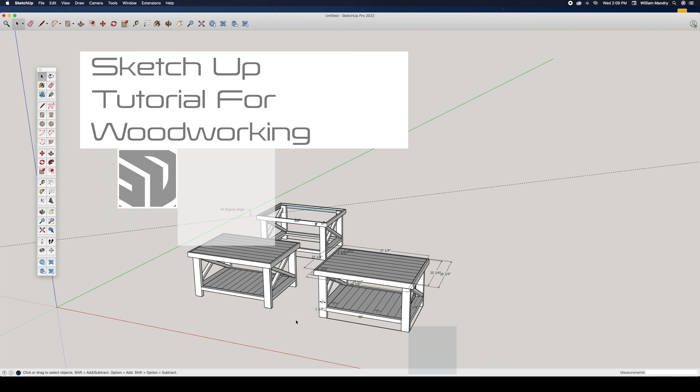In this episode, I want to show you how you can utilize SketchUp to plan out your next woodworking projects. If you're brand new to SketchUp, I'm going to show you some of the beginning tools you'll need to utilize to create these plans. In the process of designing this farmhouse coffee table in real time with you, I'll share some tips and tricks. Let's get right into this.

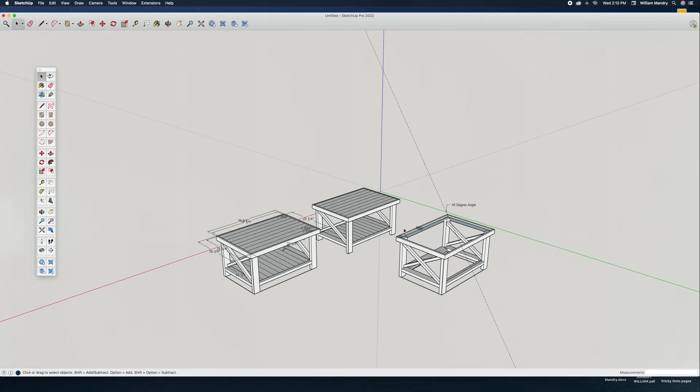Alright, so to begin here, we're going to want to go to File, New from Template, and you're going to want to click Woodworking. And I would definitely work in inches. If you're in the US, that's going to be a lot easier. If you accidentally do millimeters, it gets a little confusing. So I'm going to click Woodworking.

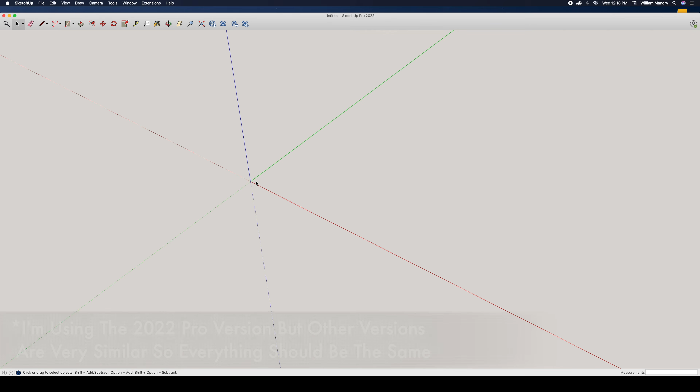Okay, so when you first open up SketchUp Pro, it might be a little disorienting because this is a new way of looking at projects, in a 3D model. Now, you see this dotted blue line going down? That's basically underground, so anything built under here is underground. The ground is these solid red lines and solid green lines, so this is basically the floor right here, and you can kind of imagine that. The blue line is just the height, so you don't have to worry about this over here. You won't really be building over there hardly at all. You kind of build in this quadrant right here, especially for woodworking—we don't really build a lot of things underground.

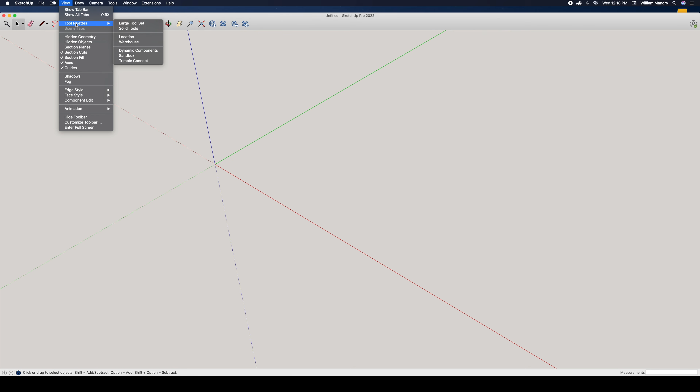Now, the first thing you're going to want to do is open up your tool palette. So you're going to go to View, Tool Palettes, and you want the large tool set. That's going to make it a lot easier to build. Now, there are a lot of key commands, and I'm going to be going through those while we build so that you can learn those.

All right, so before we use our tool palette to build out this coffee table, I wanted to mention that the way you view everything in SketchUp Pro is actually fairly simple. However, you're going to want to use a mouse that has a wheel at the top—the two buttons left and right, and then a wheel in the middle. If you don't, it makes it a lot harder to zoom in and pan.

So the pan function, you simply click on the wheel, and then it's going to let you go any direction—down, up, and side to side. All I'm doing is holding down the wheel in the middle, and then I can move my mouse, and that's how I view everything. Now, if I want to zoom in or out, all I have to do is roll the wheel. If I roll the wheel back, I zoom out, and if I roll the wheel forward, I zoom in.

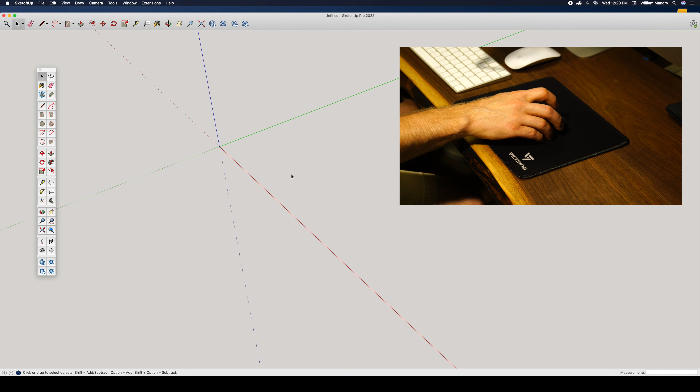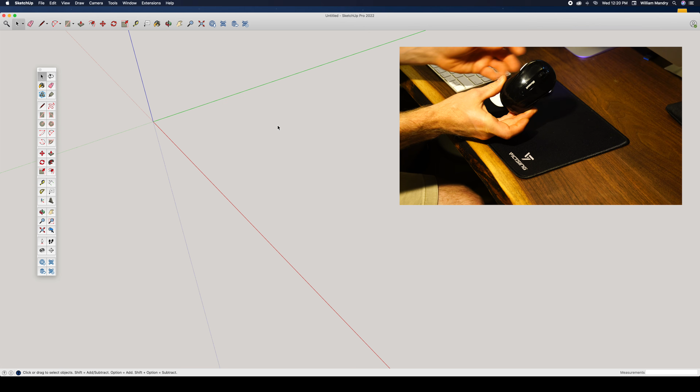If you don't have the wheel mouse, this makes it incredibly difficult—there's a lot of different buttons you have to press on the keyboard while pressing the buttons on a mouse. So if you're on a Mac, I would recommend buying a mouse with the wheel. They have wireless, wired, they're fairly cheap, so I would definitely recommend doing that. Learning the keys is going to be much more difficult, and the wheel makes all the difference.

All right, so now it's time to start designing the coffee table. Now, the first thing we're going to want to do is figure out where we're going to actually start building this coffee table. A lot of people just start at the origin—I don't really like doing this because your project is really smushed in between these axis lines. So what I like doing is bring the origin point out somewhere over here.

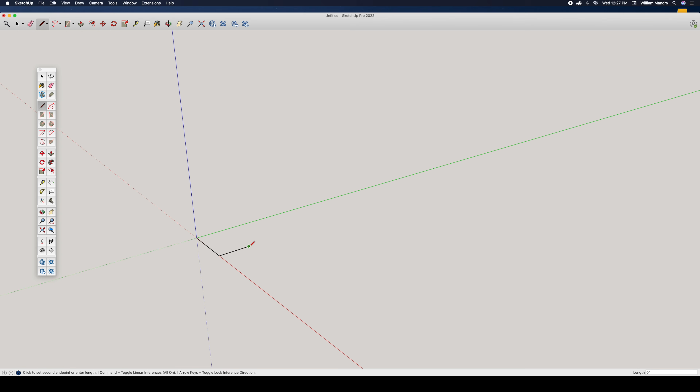To do that, I simply drag out with the line tool—that's the pencil up here on the tool palette. Usually you have the selector; if you click the pencil line, you get the line tool. Or you can simply use the shortcut, which I use, which is L. So you just push L on the keyboard and you get the line tool. Now, I'm going to be going on the axis so I know that it's level to the ground, and then I'm going to bring it out here with the green axis, kind of out here, and that's where we're going to start the project. I kind of like that a little bit better. So now we need to get our base for our coffee table.

For any project you're doing, I would recommend making a base. Whatever the footprint of your project is, you're going to want to establish that, because you might have to reference the base for some kind of measurements or adding pieces on. If you don't have a base, it's very hard for the program to automatically know where your outside perimeter is.

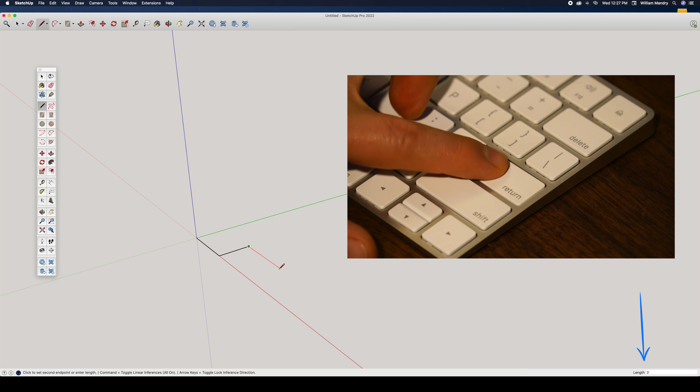So what we're going to do is drag out and lock onto the axis, then type 3 foot. You can see in the bottom right hand corner it says 3 foot, and all you have to do is press enter, and that's going to get our length. Now for our width, we're just going to drag, snap to the green axis, and do 2 feet and click enter. Usually it intuitively knows where the points are, so you can simply let it snap to that.

And now we got our footprint. This is our footprint for our coffee table. So now that we have the length, which is 3 foot, and the depth, which is 2 foot, we need to establish the height of the project.

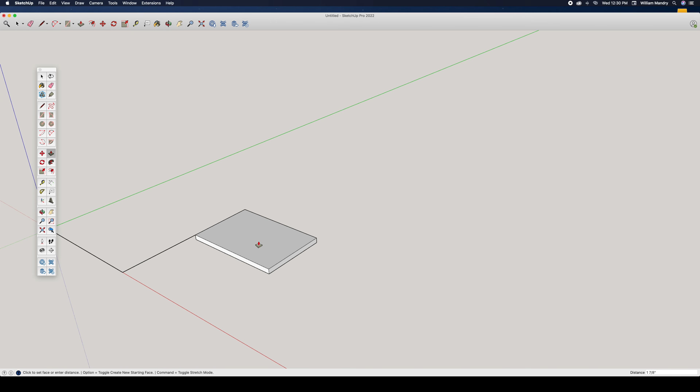We're going to be using the push-pull tool. You can simply click here, or you can click P for the tool, that's the shortcut. Now, to do this, you have to click on the surface, and while you're clicking you can drag up or down. If I click it and drag down, that's going to pull the whole thing downwards, and if I pull it up, it's going to pull the whole face upwards. While still holding the left button of the mouse, you can drag it up and down. As soon as you release the button, it leaves it where it is, okay?

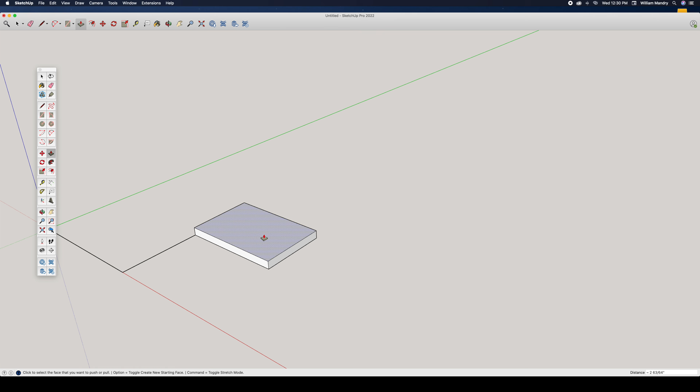After you release the button, so I'm not holding the mouse at all right now, what you can do is type in a specific measurement. So we're going to type in 20, press enter, and that's going to automatically make that cube 20 inches in height. What we have now is the footprint of the coffee table, so everything pretty much is going to be around or in this cube.

Before we put anything else on this coffee table, I'm going to show you how to use the eraser tool. You can click on the eraser, and then these lines I don't really need anymore, they won't serve any purpose, so I can simply go ahead and erase those. All right, so that's how you use the eraser.

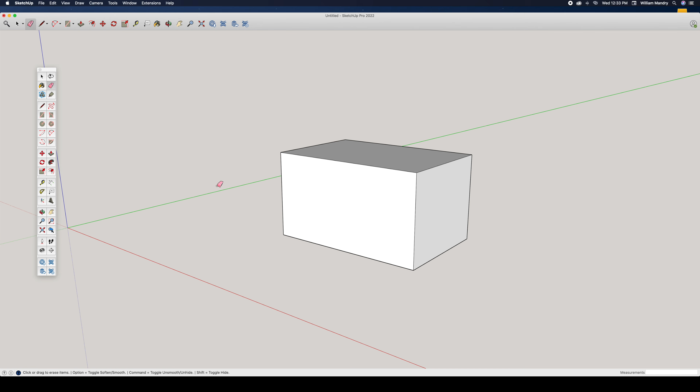Now to get back to your pointer, basically all you have to do is press the spacebar on the keyboard, and now you can select things again.

All right, so now we're going to start designing the sides for the top of this coffee table, and they're actually made out of 2x4s. So we're going to get our line tool. Basically, the top 2x4s encase the top boards of the coffee table.

With our line tool, we simply have to click at the end point, and then drag down 2 inches. So again, start the line. To get an exact measurement, I release all the buttons on the mouse, then go to my keyboard, click 2, then enter, and that makes it exactly 2 inches. And so that's our midpoint, and that's our measurement.

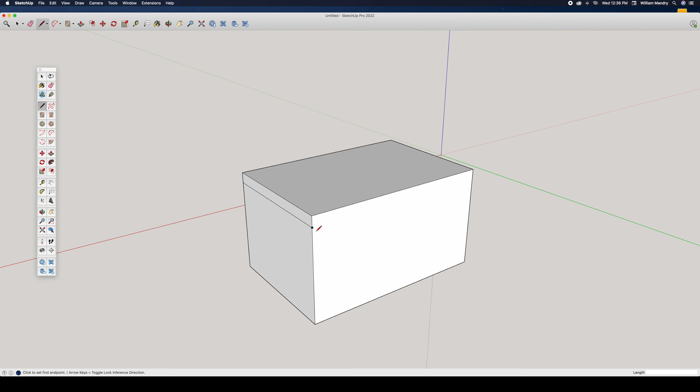Now I need to go all the way around this cube, and it should be intuitive enough to know exactly where to snap on that line, so I don't really have to make any other measurements. See, it intuitively knows if I snap on the axis that I'm trying to get 2 inches all the way around. So make sure it's on the axis when it lights up, and make sure you click on all of those edges.

Okay, so since we're going to be doing 45-degree miters at the corners for these top boards, we're going to have to get our protractor tool, and that's this guy right here. So I'm going to click that, and all we have to do is make sure our protractor, see that if it's blue, the protractor is on the blue axis. We want it on the top of the surface.

And then we're going to click on the edge of our top, and that way our protractor can drag out. Now we want 45 degrees, so I'm just going to click 45 on my keyboard and press enter, and that's going to give us our 45-degree angle. Now I'm just going to repeat that on all 4 corners, so 45.

Okay, so now you can see we have 45 degrees marked on these corners here. And that's going to be important to measure out the next part of our project. So we're going to take our line tool, so that would be L.

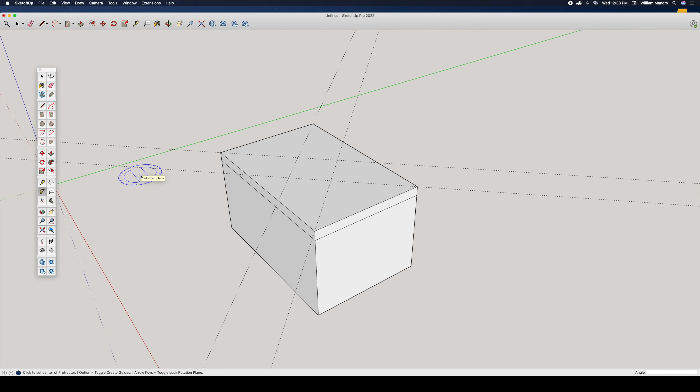We are going to go out from the edge. I'm going to actually cut these 2x4s to 1 3/8 thickness, so I'll type 1.375 and then enter. It's just easier to type in that way, I think. All right, so I click escape to end that line.

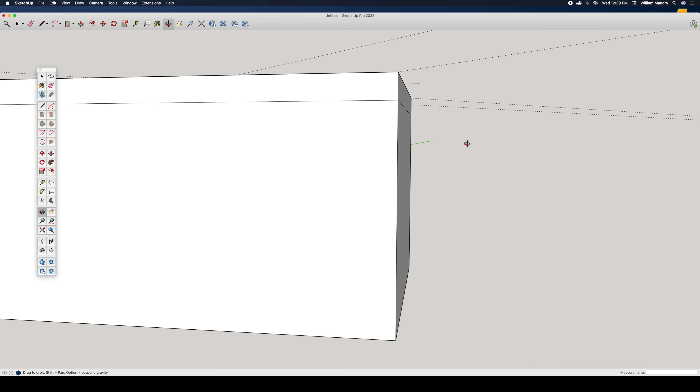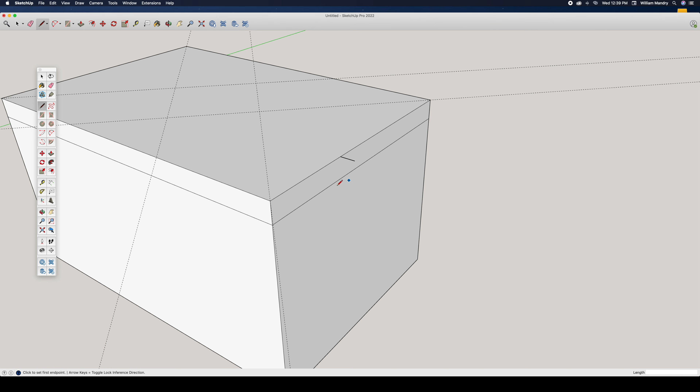Now, all we have to do is go from the end point, and you can see right here, it's on the top, out, and that line right here is basically the thickness. We're actually using the line tool here as a measurement. I actually do that a lot in SketchUp Pro, to mark a measurement so I have something to reference on. Because I can't reference right here on this line how far I need to go for 1 3/8.

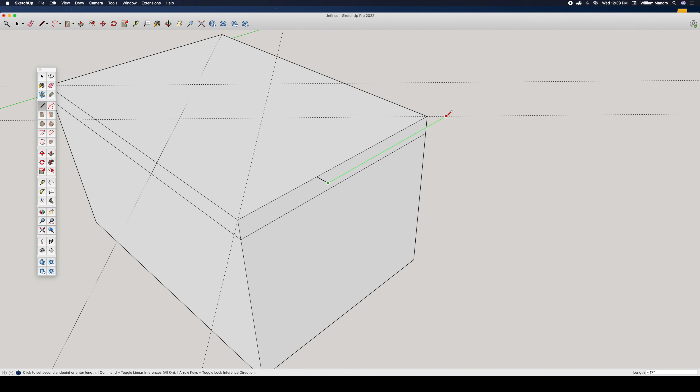But if I just measure a line here and then erase it later, it works perfectly. So I had this reference point, and now I can just click it. Since I have the thickness measured and the 45-degree measurement, look, it already knows what I want to do. So just from the end here to the 45-degree line, and then I'm just going to do that all the way around. Again, the program already intuitively knows what you're trying to do based on the measurements you have and the axis you're going on.

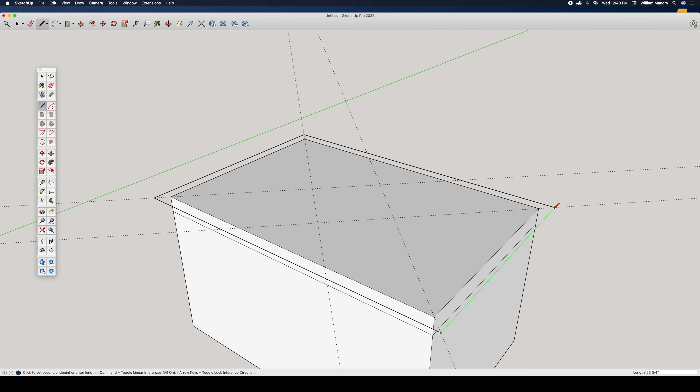Okay, so I'm going to go all the way around here, again using the pan tool to pan around while using the line tool. I just click the scroll at the top, scroll around, and make sure you click all the lines. Now I'm going to press escape to escape out of that, and then get the erase tool because we need to erase this half line right here, and then this line because it was just a measurement. So we're going to get rid of that, click L for our line tool again, and then finish off that top.

Okay, so that's what the top is going to essentially look like. But there's a few other things that we need to do to get this right. So to make these 3D - right now the 2x4s are basically just a 2D model, and we're going to need to make this 3D.

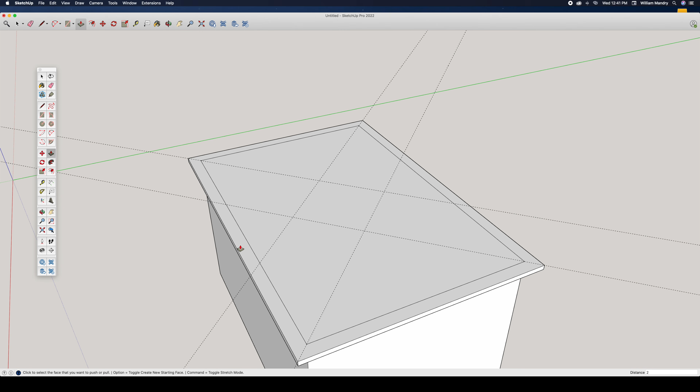So to do that, we're going to do our push-pull tool, which is P, and then we're going to push this whole thing down. Again, you just click it, drag it down, and then release the mouse, and then you can type in how far down you want to go. We want to go down 2 inches. Okay, there we go. And now that's basically going to be the top edge of our coffee table right there.

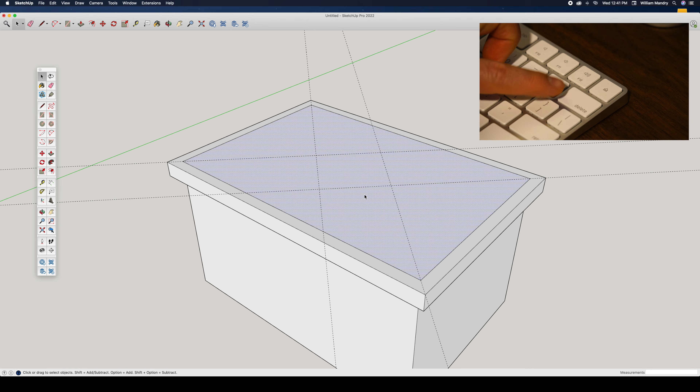All right, so now we're going to use our selector. We're going to select the middle of this coffee table and we're just going to delete it. We don't need that right now. So now we're left with this.

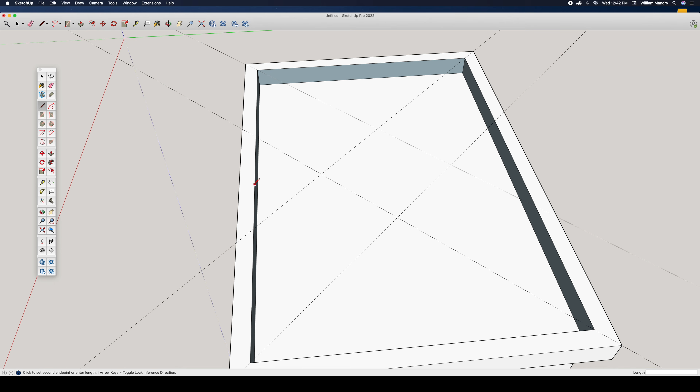The next thing we're going to do is create the rabbeted edge on these 2x4s for the top boards to go into. We're going to measure from the edge, go out, make sure the line is on the axis, not like this - see, it turns black when it's not, but it turns green when it's on the axis. So you're going to want to make sure you remember that.

Now we're going to go out 5/8. And like I said, I don't really work with fractions. I just do 5 divided by 8, which is 0.625. So I'm just going to type in 0.625 and enter. All right, so now we have this line.

Now that's our rabbeted edge. So we're going to have a rabbet 5/8 wide and then 5/8 deep, because our boards for the top are going to be 5/8 in thickness. So it just gives it a nice measurement.

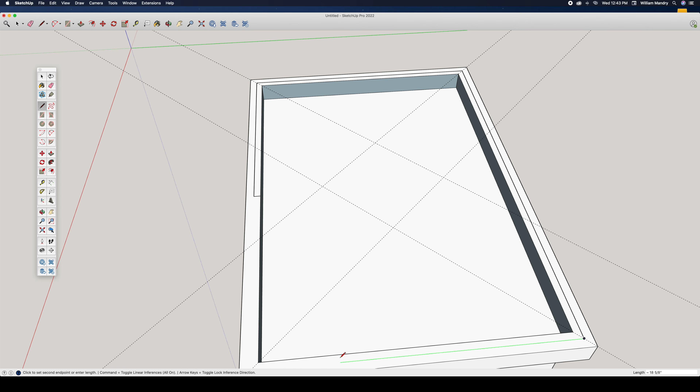So this is going to have to go all the way around, and then on that line - we're going to go all the way around because the rabbet cut has to go all the way around. Or it's like a relief cut, there's a couple names for it. I usually just call it a rabbet.

All right, then we're going to get the erase tool and erase that line that we used as a measurement. All right, so now we need to push-pull the inside down 5/8, and that's going to get a rabbeted edge.

So you can see here that it's highlighting that whole inside edge, and we simply have to drag it down just a little bit, and then all we have to do is type 0.625, which is 5/8, and there we go. So there is our rabbeted edge that all the top boards are going to sit into.

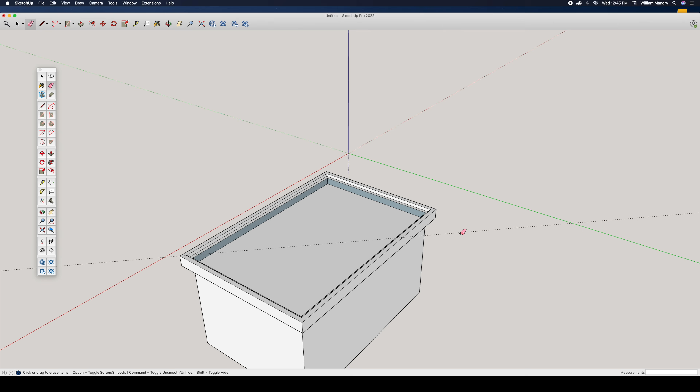Now that we have that, we don't really have any use for the 45-degree measurements anymore, so we're just going to go ahead and use our eraser tool and get these out of here because they're just for reference. Since all these boards are actually different boards and they're not going to meet perfectly like that, we're going to create our seam here to more accurately represent what it's going to look like.

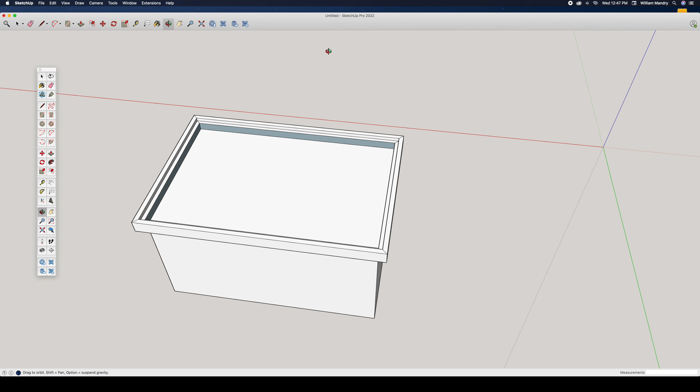All right, so now we have the 2x4s all the way around the top completed.

What I'm going to do here is click the space bar and select all these faces and just get rid of them. And the bottom one. All right, so now we're left with this.

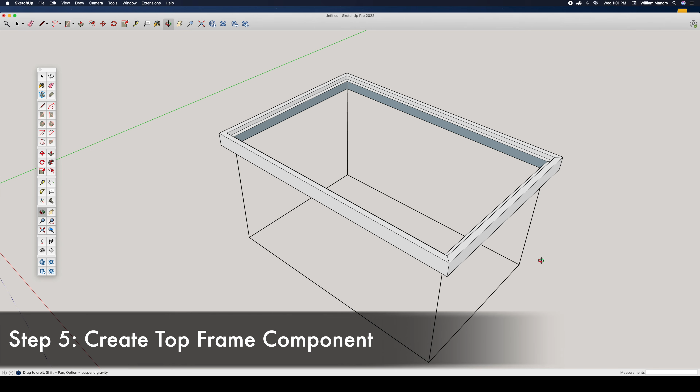Now, what I would do here is go ahead and triple click. If you double click, you click the face, but if you triple click, you click all of everything touching one another.

And we're going to make this a component by clicking this, which is the little blue grid, and click that. And we're just going to name this top frame.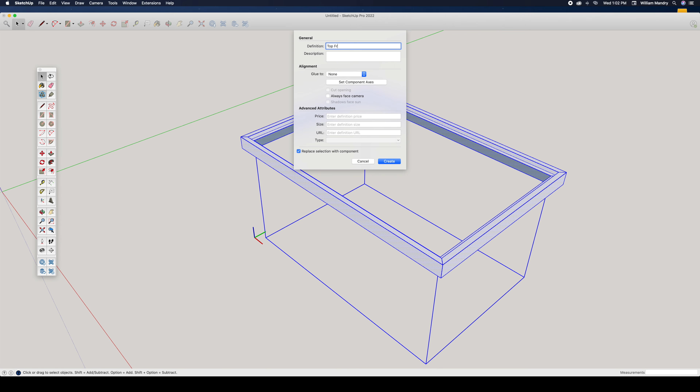Now what you can do with this is if you want just this view right here selected and nothing else, you could click M, which is the move tool, and then click option, and that's going to make you able to copy it. So we're going to copy this and just put it over here to the side.

And then we can use this as a reference, or maybe you screw this up and you want to go back to this stage. Either way, it's kind of useful.

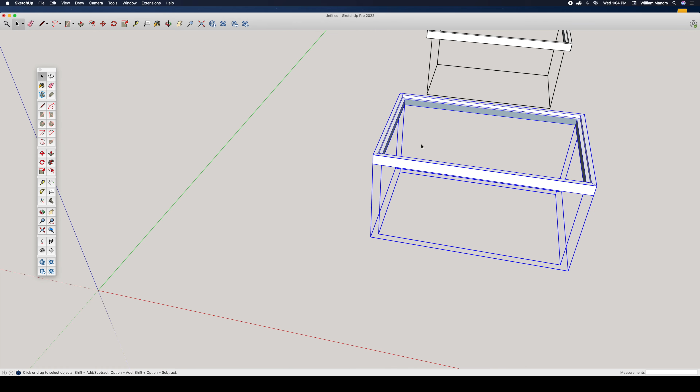All right, so now that we have this as a component, if you go to your select tool or spacebar and click it, you'll notice that this whole thing is now a component and not different pieces. And so we have a copy of the component over here, and then we have this as a component. And what that's going to enable us to do is to build things off from it without affecting this structure.

Okay, so now we're going to move on to creating the 2x4 legs, and we'll just start right here. We're just going to get our line tool, which is L. We're going to measure over 3 inches because that's how wide I want these 2x4s, and I'm just going to cut the 2x4 at 3 inches wide. So I'm going to click 3 and then enter.

And then from that endpoint, I'm just going to go up, and we're going to make the 2x4 go all the way up to the edge of our rabbited edge. So then click that, and then I'm going to click over, and then go down along this edge, and that's going to create a 2D face for that 2x4.

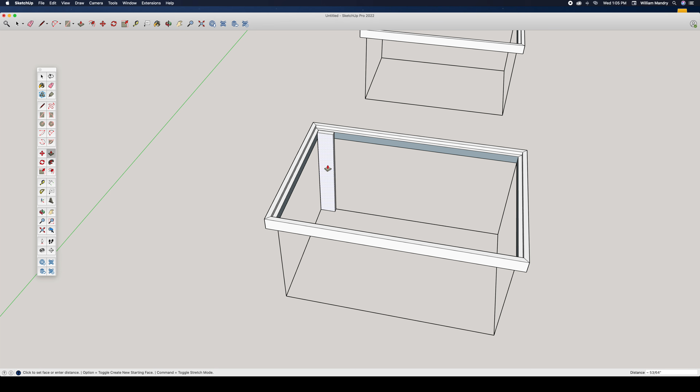And now to make it 3D, all we have to do is use the push-pull tool, which is P, click the face, drag it out, so 1.375, enter. And now we have our 2x4 leg, and we just simply repeat that process 3 more times.

So all we've got to do is click line tool, go over 3 inches, enter, and then P for push-pull tool.

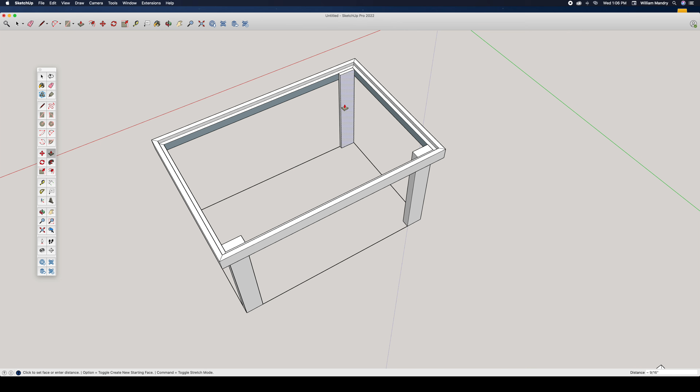All right, so now that we have the 2x4s at the top and then the 2x4s coming down, we're going to go ahead and create the shelf that's going to be towards the bottom.

We're going to get our line tool here, and I'm going to be going up 3 inches from the bottom. So again, I'm going to be using the line tool here as a measurement. Basically, it's just easier that way for me. So I'm just going to go up.

I'm going to click 3 inches and then enter, and then drag the pencil up, and it's going to find the midpoint of the line I just made, and it's also going to find the end point of the line I just made. And I think that's a really easy way to find where you want to come off from. So then I just click that endpoint, and I'm going to go across the axis all the way across, just like that. Now, this is going to be another 2x4 that's cut at 3 inches width.

So we already know what the width is, but we need to get the thickness. So all we have to do is drag our pencil line up this axis, and then we're going to click 1.375 again.

So 1.375 is going to be 1 3/8, and that's the thickness of all my 2x4s. I'll enter that, then go from that point over. Now we have the side of our 2x4. To complete this, I simply take the push-pull tool, push it, click 3, and enter. Now we have one of our base pieces on.

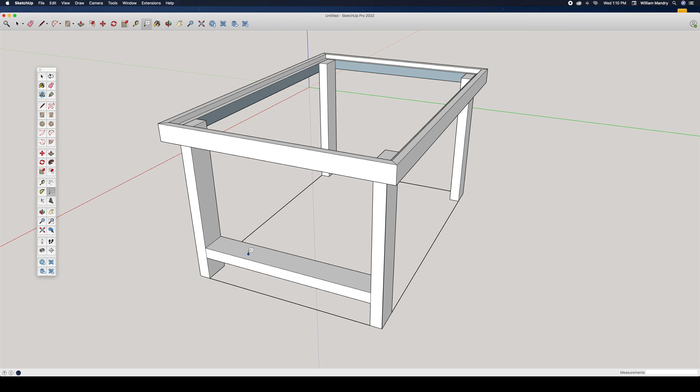We're going to create the other 2x4 side piece over here the same way, using the line tool. I'll go up 3 inches, zoom out, go from that endpoint over, then up 1.375, then over, snapping to the axis and edge. Then P for push-pull, push it, click 3, and you've got the other board.

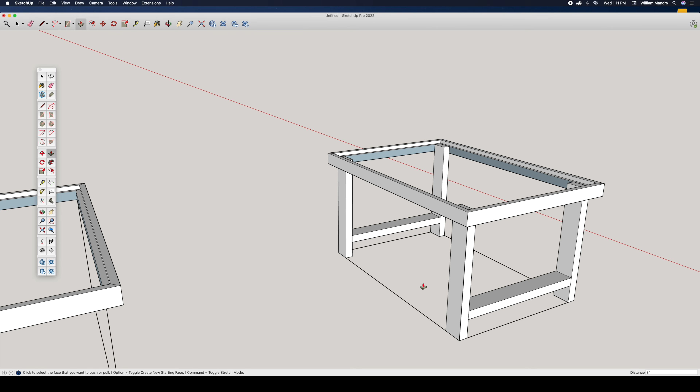Now we need to create the 2x4s that go this way. Instead of measuring it all out again, I can zoom in, click this edge, go over to the edge I want to reference, and it transfers that measurement onto that edge. Then I click that, zoom out, and snap right here, giving me that line automatically.

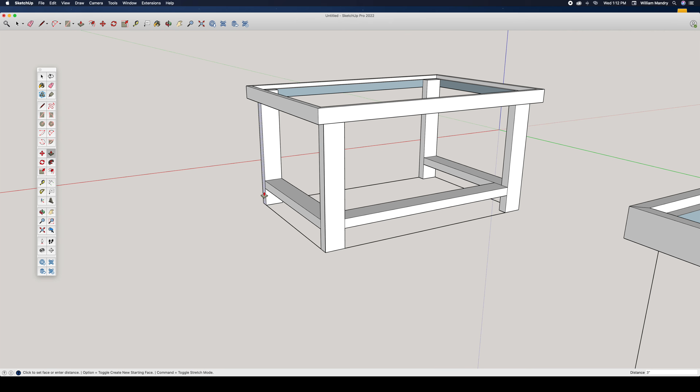Same thing here - it already knows exactly what I want to do because it's referencing another point, so I'll just utilize that. Then again there, and I'll use the push-pull tool to push it 3 inches. There we go, and I'll repeat that on the other side.

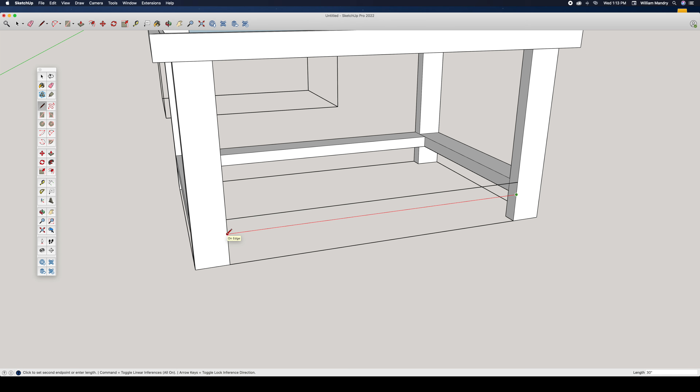So: line tool, zoom in, reference that point, go over, let it snap, then down, let it snap, then over, let it snap, push-pull 3 inches. All right, so now we have our baseboards.

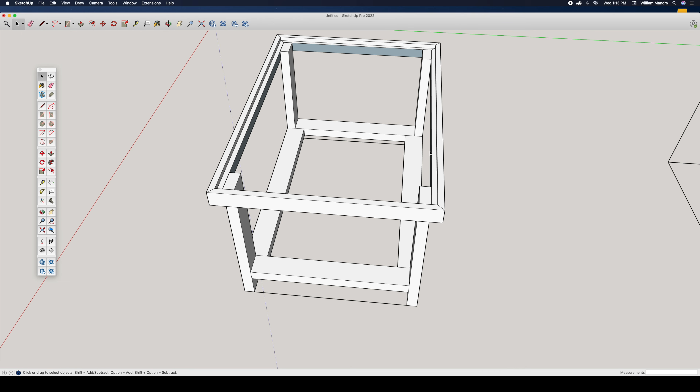Now the only thing we need to do is create another rabbeted edge for the boards. The boards are sitting at the top right here, and they'll sit in this rabbeted edge, going across and sitting in here. I'm going to do the same thing at the bottom, but it'll be a little different - I'll show you what I'm going to do.

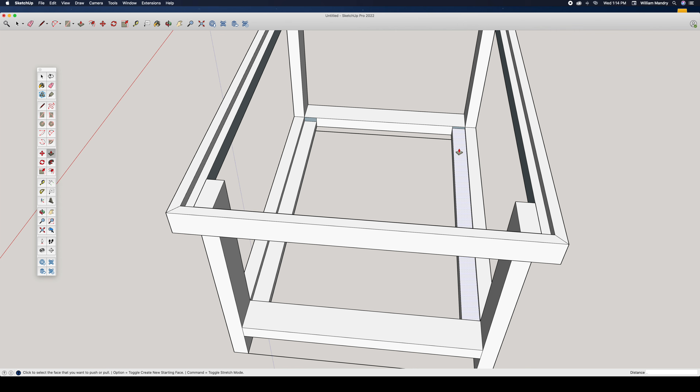I'm going to create a line from the edge of the 2x4 that's going up, all the way across, and do that on this side as well. Then we'll get our push-pull tool and push this down 5/8, which is 0.625. I'll do the same thing right here, 0.625, giving us a nice 5/8 rabbet to lay our boards across.

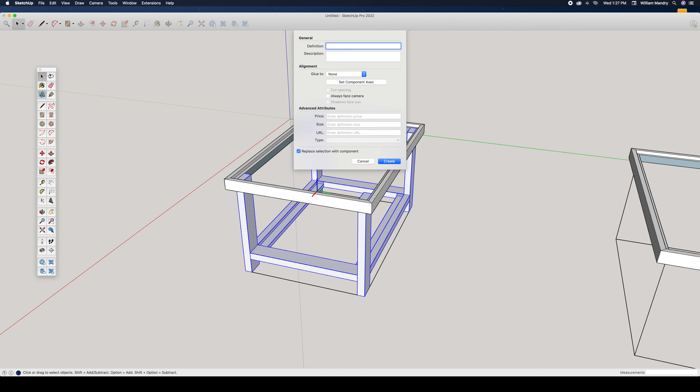Now that we have this structure, we're going to click it all - triple click to select everything. Now that component is our base, our legs and our base, so we're going to make that a component. We'll go to the blue grid, call this 'base,' and create that. Now we're going to create our X's, which go across right here.

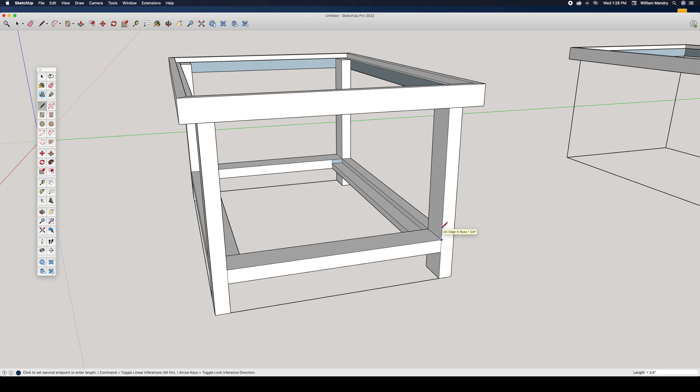We're going to go up from the edge here to 1 3/8. Then over to the intersection right here, because we want it to stop where we can see it, and down 1 3/8, just like that, then down to the corner here. Now we'll use our push-pull tool to push that 1.375, and there's our first X.

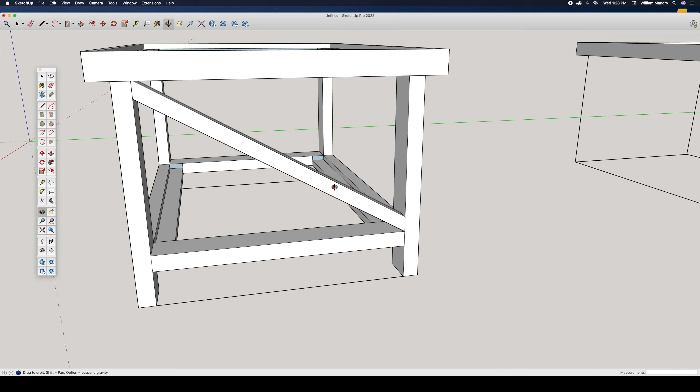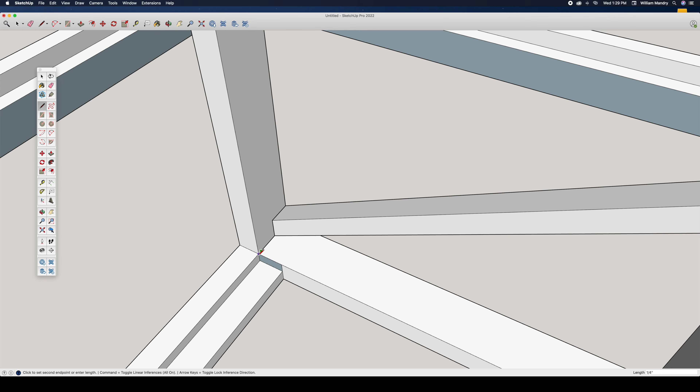Now we're creating our next X right on the edge of that one. We'll go inside here, and this one goes the other way. However, we need to make this match up, so first we'll do a line from here and go over 1.375 - you can see it's not quite to the edge here, and that's why we had to do this measurement. I'll go up all the way to the top, and over from here to here - we know that right there is our intersection.

Now that we have these lines - and again, these are just measurement lines - we're going to go over from this point 1.375, and then this point should snap to the grid.

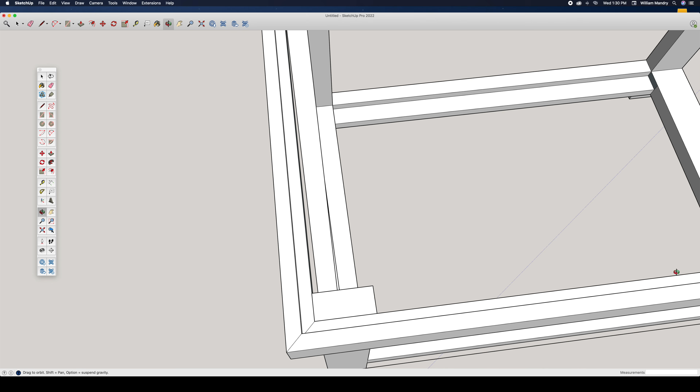Midpoint in base... there it is. On edge, yeah, see? It finally figured out what we're trying to do. I'm trying to get it on the edge because those pieces are going to be together.

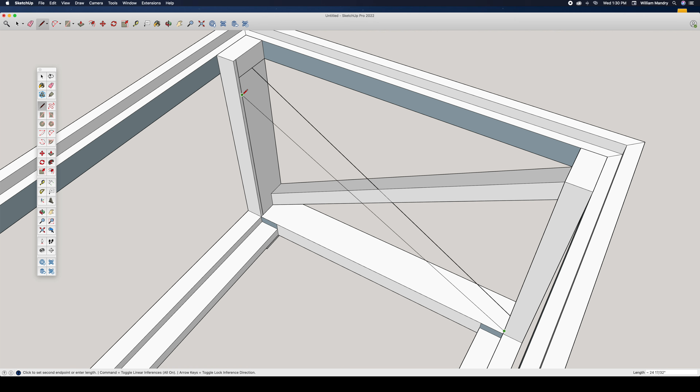All right, now we can go over 1.375, and now it's figuring out what we're doing. So on the edge, then go up to here, and then go down. There we go.

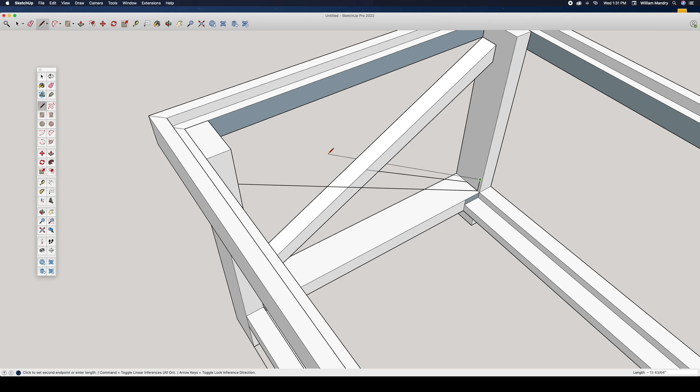Okay, and then we're going to go to our eraser, erase this point, get our line tool. Now we can go up from here. There we go, and go up to there. Now we have it. All right, we'll erase everything else. That was a little tricky.

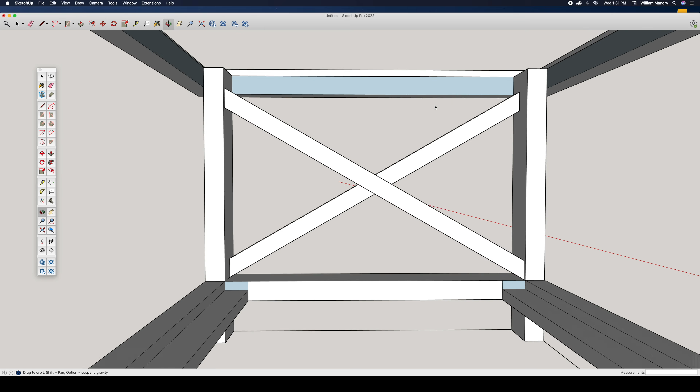There might be an easier way to do it, but it's just because the measurement didn't land right on the edge of this board, so we kind of had to float it in there. Sometimes that's tricky when you have to float a piece inside another piece like this. Sometimes that can be hard. So now that we have that right though, it's the perfect X.

Now we can go ahead and push-pull it 1.375, and it should match right on the edge of that board. Yeah, there we go. All right, so let's take a look at how that looks.

There we go. So I'm gonna click on our X pieces, and you need a triple click. So triple click and you get the whole X. Then I'm gonna go to component and call this X.

Then you simply have to click the M for move tool. Then you're gonna click option key and that's gonna make it copy. You can see the little plus. When I push it, I make sure it stays on the red axis, okay?

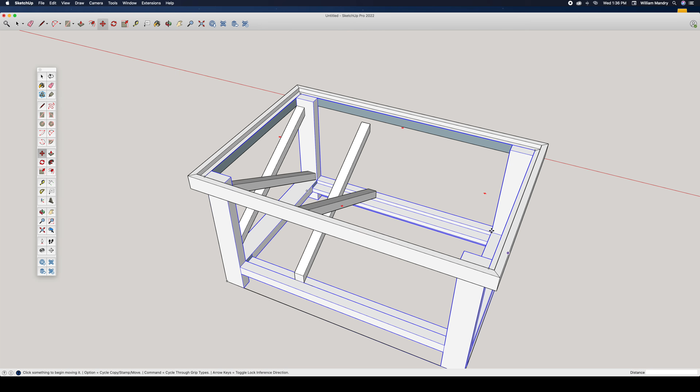Now I need to orientate my screen differently to make this measurement go in right. So I'm gonna orientate my screen differently. I'm gonna re-click it and just move it on the red axis. If it moves off, you can always put it back on, okay? Now I'm gonna get it as close as I can by looking at it. Okay, that looks good. Now I'm gonna release.

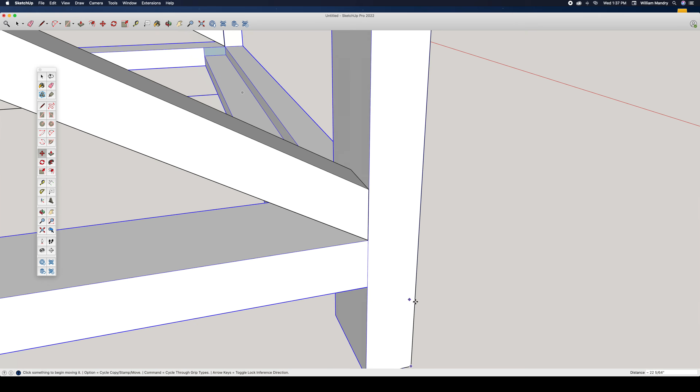I'm gonna zoom in here. And if it's not perfect, I can always get it more perfect, but I'd say that's pretty perfect. And then we can zoom out, and now we have our X's in place.

Now what you can do is click on selector, then click the X's, see how it clicks both X's. And then now I could do component, and I could call this X times 2, or X's actually, I'll just call it X's. All right, there we go. Now we have that component.

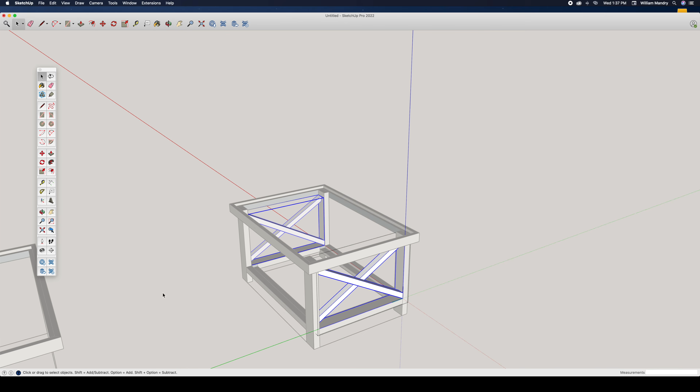All right, so let me show you how these components work now that they're all done. I can simply get the move tool, which is M, and then I can move out the different components. So this is what we did with the top. Okay, so if I wanted a new top, I can simply move that out and build a new one.

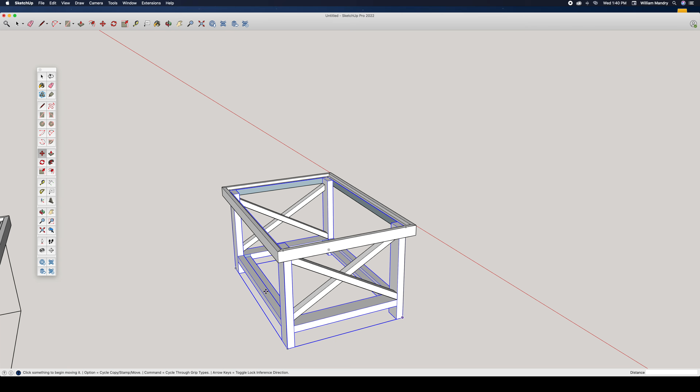Maybe I want to see what it looks like without the X's, so I can simply move out the X's, see how it looks, and then move them back in by just undoing my action. Or maybe I want to create a new base, I can just move the base out. So that's a really easy way to modify the coffee table if you don't like the design and want to try different designs out. That's basically what the component tool is supposed to do.

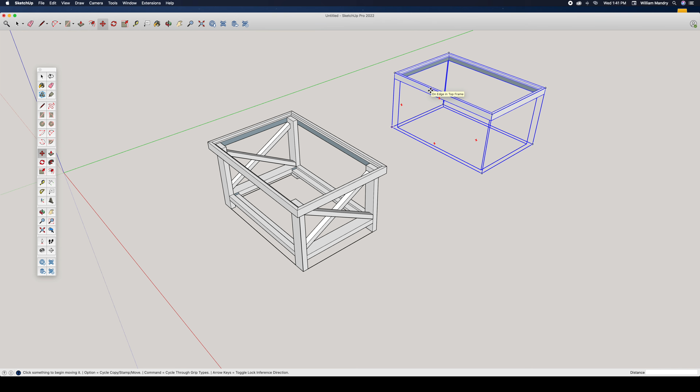So we're going to go ahead and delete this guy since we know that we like the design. All right, so now that we have this all done, I kind of want to make a model of just that in case I want to play around with it.

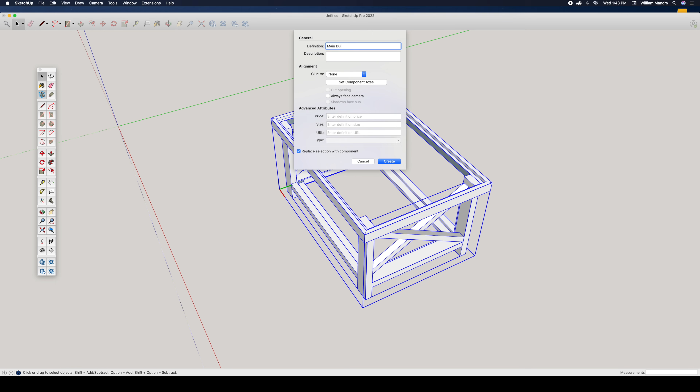So I'm going to select all of this by highlighting all of it. Hold on, let me do that again. Get it all. All right, now that selects everything. And now I'm going to make this a component, and I'm just going to call this main build.

Okay, and now what I'm going to do with that is I'm going to move this. I'm going to click option and copy this because this is basically the main build. The slats on the top to make the top and the shelf are fairly simple. This is what I want to see, the underneath side. So we got that copied. Now I want to keep this as a full component, but I want to explode this. So by explode, basically you make different components again.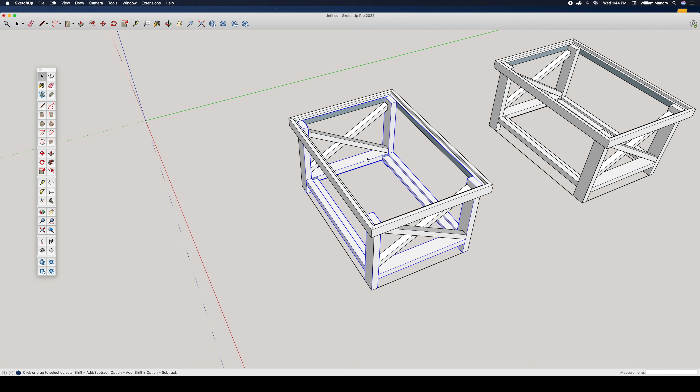So I'm going to go spacebar, click this, and click explode. Now that should make it to where all my individual pieces are left intact. And they are. All right, and then this should be one full piece.

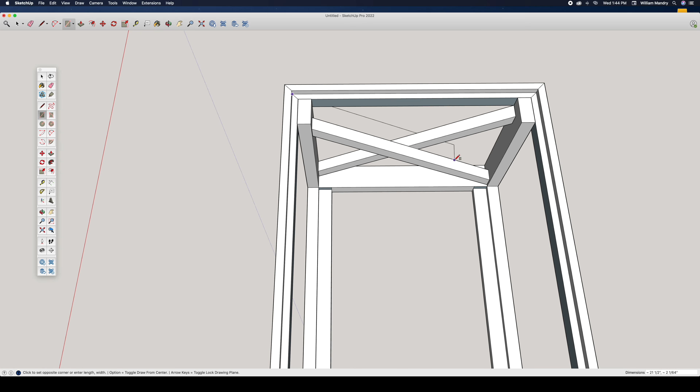So now if I build the slats onto here, I could just reference this as the main structure to get my measurements. I'm going to get my rectangle tool, R, drag from the inside corner here, and then go to the other side corner. Then I'll drag that up, push-pull, and push it up 5/8, which is 0.625.

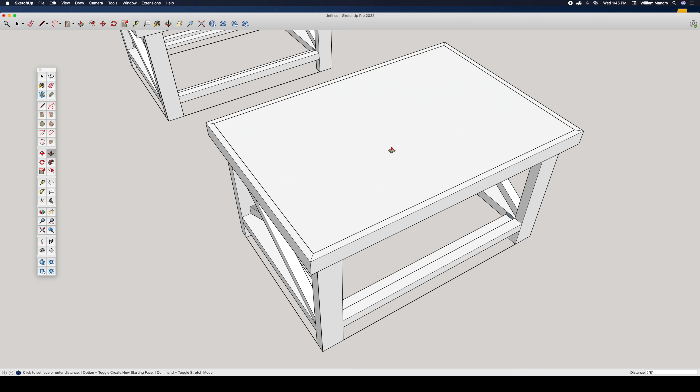Now obviously it's not going to be one sheet like that, it's going to be slats. So next, all we got to do is take my dimension tool and measure from this point to this point. And that is 25.25. So the left side, after doing measurements, is going to have to be...

37.25 long, comma, 3.0625, which is 3 1/16. And there we go.

And then the next one is going to have to be 37.25 in length, comma, and this one's going to be 3.1875, which is 3 3/16. It shouldn't be noticeable when you look at it, but it was necessary to make up for the odd number.

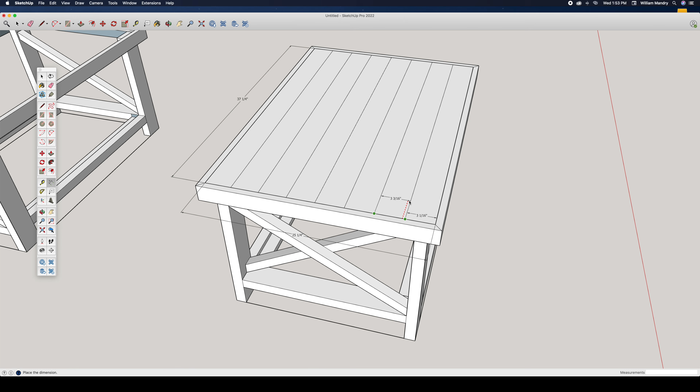Let's just double check that. We'll measure it and make sure that this measurement right here is 3.0625 width. Yep, 3 1/16. And then all these are 3 3/16. All right, so we got that done.

Now we need to do the bottom. I'm going to go ahead and triple click this top, make it a component, and call it top. Now I'm going to go ahead and hide this - you can right click and click hide. That's going to allow me to create the bottom without having to try to view through there.

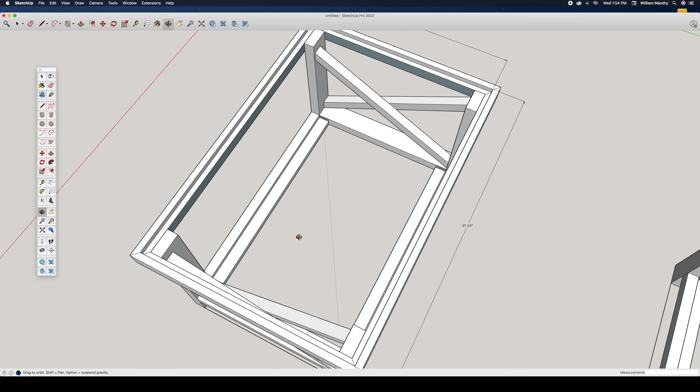Okay, so now the bottom, I'm going to be going the opposite direction. We're going to do something similar to what we did at the top, which is create a rectangle here, and then use the push-pull tool to push it up 5/8.

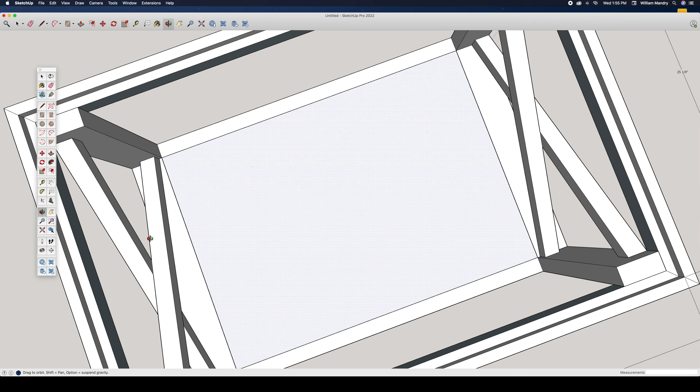All right, so now what we have to do is create our slats. I'm pretty sure, if I remember correctly, they're even. So I'm going to use my dimension tool from that point to this point, and yeah, we get a nice even 30. So if we make all the boards 3 inches wide, then all we need is 10 boards.

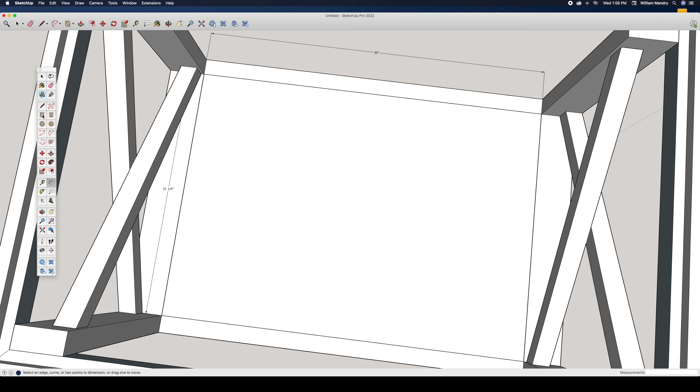I need to do one more measurement here, from this point to this point. Okay, so it's 20.25. We'll take our rectangle tool and type in 20.25, comma 3. I'm going to take the rectangle tool and create 9 more of these. So here we go, 20.25-3. All right, there we go.

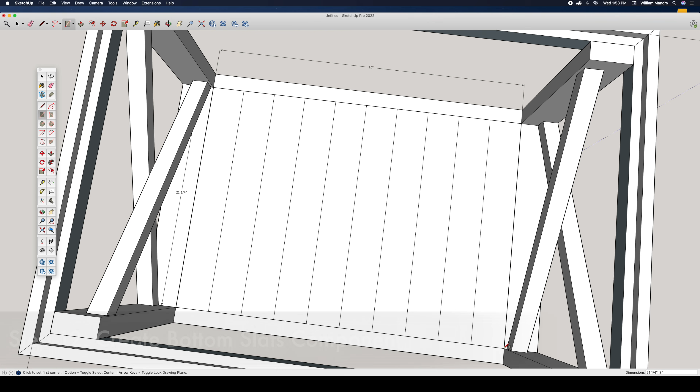And so now we're going to triple click to select all, make this a component, and call this bottom. Then what we need to do is go to edit, click unhide, and do all. That gives that piece back. All right, so there we have it.

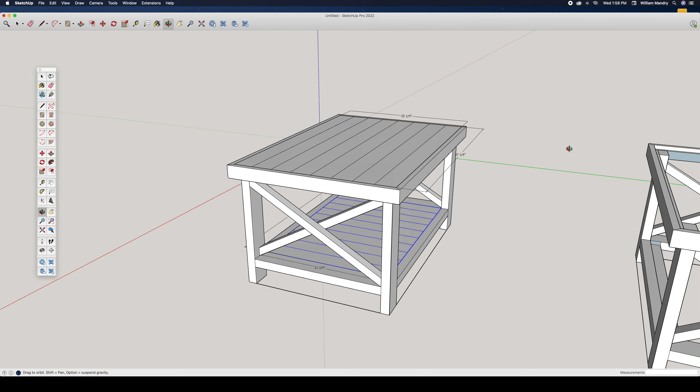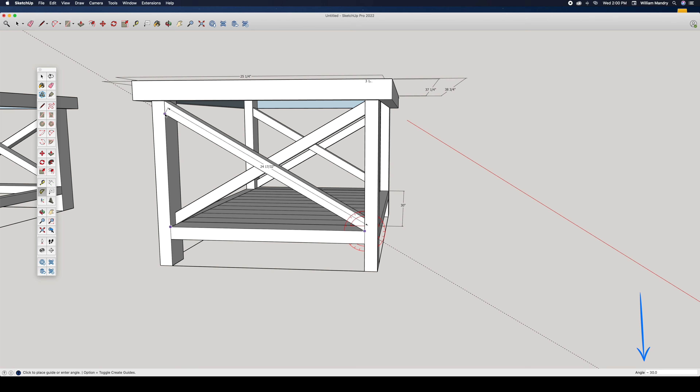And so now you can take your dimension tool and I can put all the measurements on here. One cool thing you can do is you can actually get angles. So I can take my protractor tool, select here, and see what that angle is. So that angle is 30 degrees.

So I can click there, and now I know that when I go to cut this board out, all I have to do is cut a 30-degree angle. That's really cool that you can put that in there. And then you can annotate it - I can click on this dotted line and just say 30 degrees.